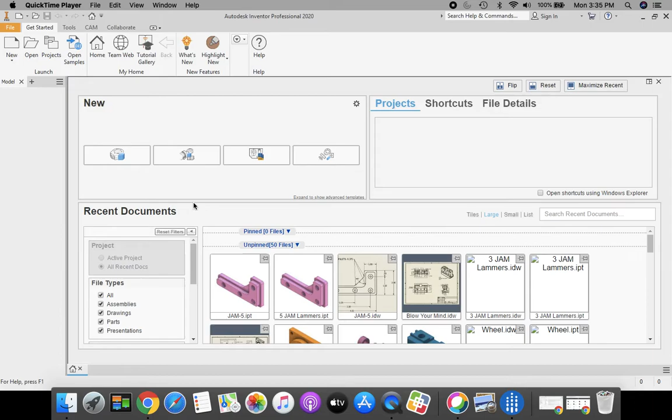Either you have your 5-jam part still open on your screen, or you need to go up to the ribbon and go to open. And then we're going to select our H drive from the pull down menu. Remember, that's that gray box with the green line underneath of it. Scroll down, find your 5-jam part, and click open.

Okay, so once I have my part open on the screen, what I need to do first is above the ribbon bar, change from the 3D model tab and go across to your CAM tab. Once you're in your CAM tab, the first thing that we need to do is set up our part. So click on Setup, the Setup folder right here, and that should initialize a new tab in our model browser that's over here on the left hand side.

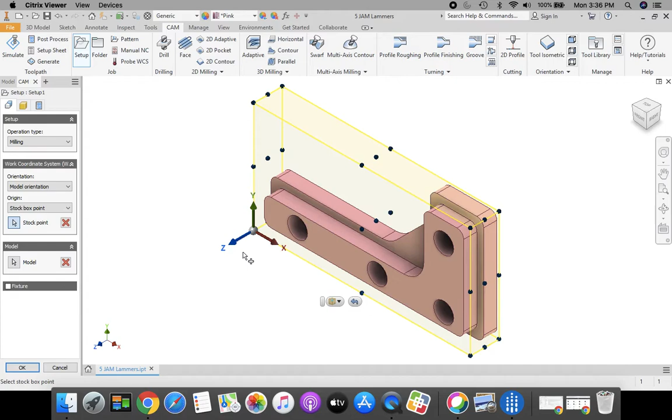Okay, the first thing we're going to do is choose where it says origin. We want to have it say stock box point. You can see that our origin is sitting in the middle of our part. We need to choose the lower left hand corner of our part for our origin, because that's where our mill starts.

Next, let's move across to our stock tab. This is something new for us. Usually we've been changing this to no additional stock. We're going to leave it at add stock to sides. We're going to change the side offset here to 0.25. Everything else we're going to change to 0.

Okay, so here, add stock to sides. We want 0.25 for the side offset, and top, bottom, and round to the nearest we're leaving at 0. It increases the size of our part, but it leaves us enough that we could run our tool along the outside of this and still leave those tabs and have it clamped into the mill. So let's look at how to cut this.

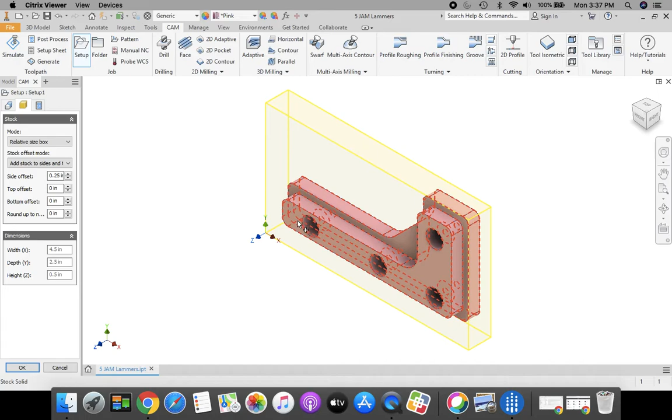The first thing that we're going to do is pocket these areas in here where we had that weight reduction and for our counter bores. We're going to do that on a 2D pocket, and then we're going to come back, drill our holes, and then contour cut going around the outside of our part.

Let's finish up with our last tab. The program name and number, I'm going to highlight that 1001, and I'm going to put in 5-jam, name of the part, plus your last name, and then click OK.

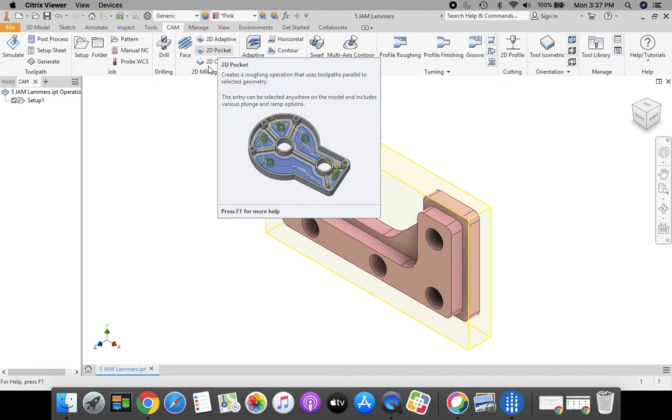Alright, let's take a look at how to cut this part. The first thing we're going to do is choose our 2D pocket from our 2D milling area. Once again, we need to choose that tool, and either we're taking it out of sample libraries and end mills, tool number 2, or you scroll all the way down to the bottom, Butler MS tool library, 1/4 inch flat tool number 2 is what we're starting with, and click select. It shows us what our tool looks like. Let's move on to our next tab.

We're going to select our pockets. Now first I'm going to rotate this around so that I can see the bottom of the counter bores. You can do that by using the rotate tool here. Then I'm going to select my geometry. So I want the bottom of each one of these counter bores. When I zoom in, I want to make sure I'm getting that bottom surface, not this outside edge. And I want to do that on all 4 of these counterbore surfaces.

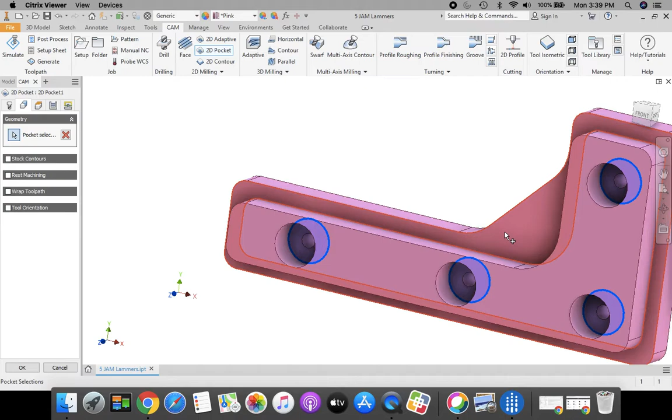And the last thing I want to do is click on this area for that weight reduction that we're cutting away. And go home. That looks pretty good. Next, let's go establish our heights. Same as we've always been doing, we're going to use model top and 0.2 for each one of these in the top 3, model top and 0.2.

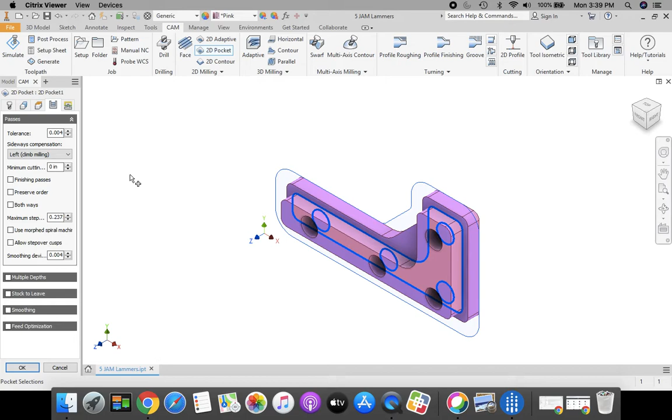Once you have that done, moving across to our next tab, we are going to uncheck where it says leave stock. We don't want any stock left over, we want it right up next to our geometry. Next tab over, we're going to uncheck lead in, uncheck lead out. And our ramp style, we're going to change to plunge. Okay, that looks great. Good job. Click OK in the model browser on the left-hand side.

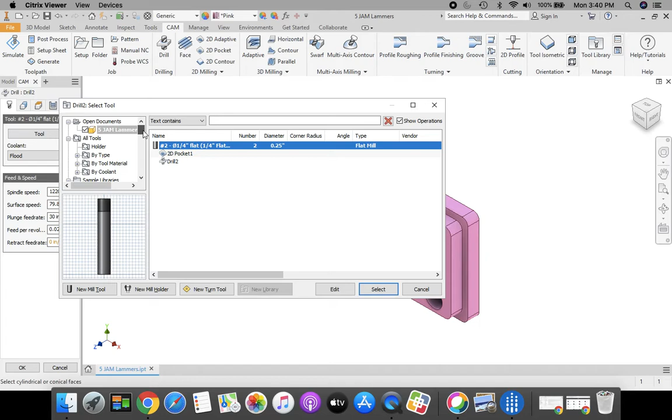Okay, next we're going to take a look at drilling those holes that are in here. So I'm going to go next to my drilling operation. Click drilling here. And what I want to do first is select which tool I want. That is in our sample tool libraries and end mills, we're going to choose tool number 1. Or you can scroll all the way down to the bottom, Butler MS tool library, choose tool number 1, 1/8 inch flat end mill. Click select.

Once again in my navigation bar on the right hand side, I can click rotate and rotate this up so I can see those holes. I'm going to change to my geometry tab and click each one of these 1/8 inch holes that we made with our hole feature. It doesn't matter what order you click them in, since we have optimized order turned on, so the computer will decide the order for us.

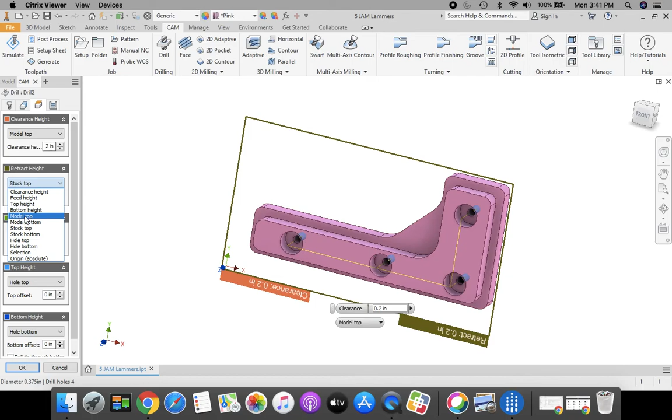Next, let's establish our heights again. As always, we're choosing model top and point 2 for top, retract, clearance, and feed height. That seems to work really well for us. Moving on to our final tab, it shows us that it's a drilling operation, and afterwards it will rapid retract out of that hole to move on to the next thing. Click OK at the bottom of the model browser when you're finished.

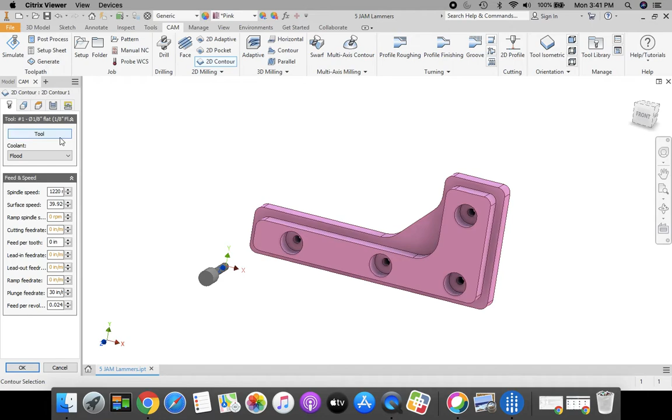Now we're going to go on to our contour. This is something new for us. We're going to come up to 2D milling and find 2D contour. I'll click home first. The first thing we want to do is choose our tool. We're going back to our 1/8 inch tool and changing it to 1/4 inch, so tool number 2, 1/4 inch flat, and click select. That gives us the right tool to go around the outside of this with.

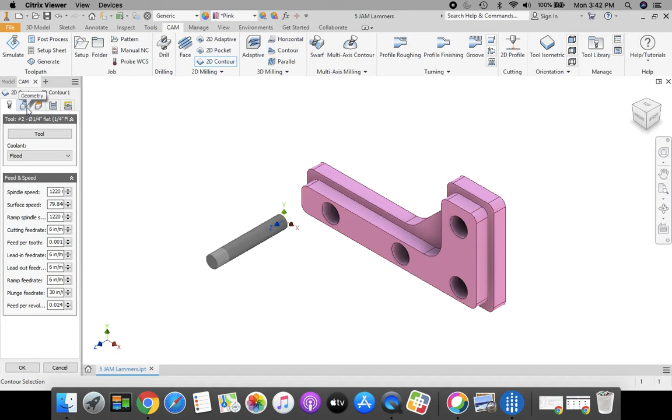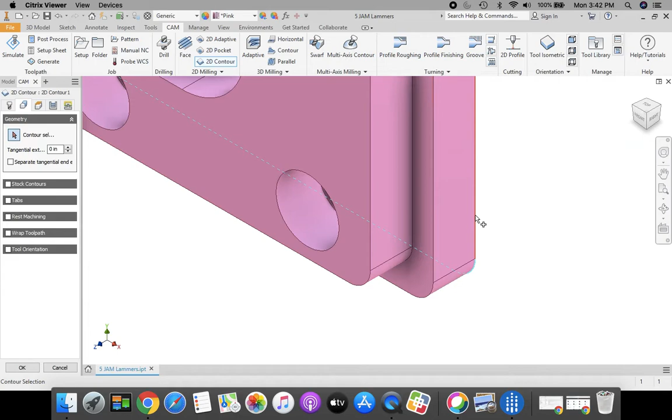Next, we're going to go to our geometry tab and select this bottom edge. Let me zoom in to show you - I want this bottom edge of my part. Make sure you're not selecting a surface or a top edge, we want the bottom edge, the back edge of our part. See how that back edge is all highlighted? That's what we want. Then in this same tab, we're going to turn on the tabs option.

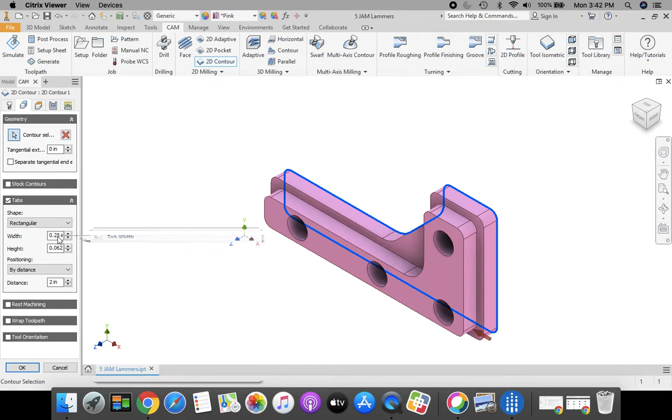In here, we'll be okay with rectangular. We can have a width of 0.25, height of 0.06, and the distance spaced 0.75 apart. You can see how it puts our tabs in here, so that when we're clamping our workpiece, these tabs will hold it, and it will be clamped in place still after we're done cutting. So that's something new for us, this tabs option.

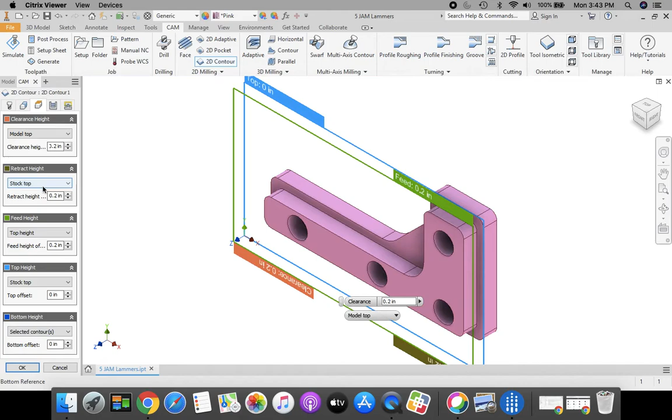Let's move on to establishing our heights now. Once again, model top and point 2 for each of these top 3. Next, for our passes, we're going to scroll down. Stock to leave is already unchecked, so we're good to go.

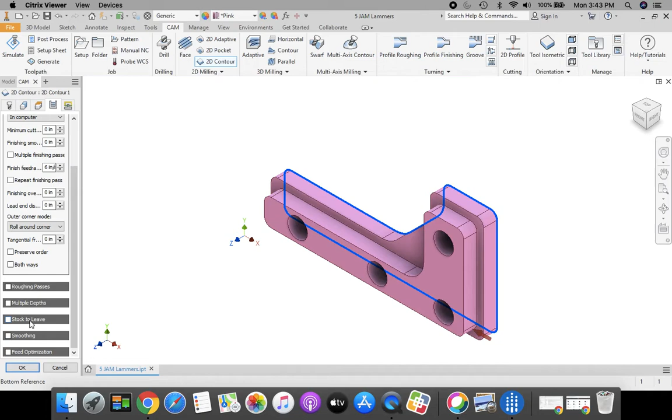Move on to our last tab, the linking tab. We want to uncheck lead in, uncheck lead out, and our ramp - nope, our ramp is fine, we're going to leave that the way it is. Okay, so we're looking good, that's our last tab. Click OK.

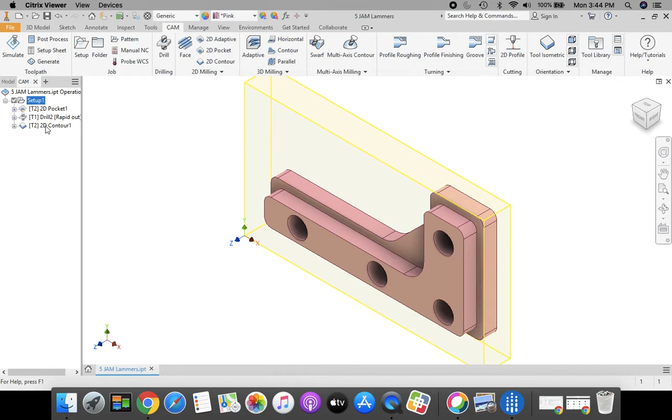So here we have our three tool paths that are created. Let's go up and click Setup 1. That's going to take care of all of our setups, and you can see from my front view how I have extra stock at the top and the sides. I'm going to turn my simulate on, select the stock option that shows us my full part, and click play.

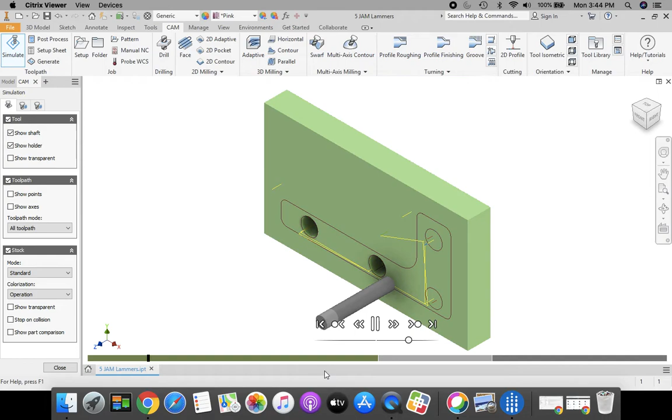It's going to cut those counter bores, then it's going to pocket out the area, drill our holes, and then it's going to contour cut around the outside of our part, leaving those tabs. That gives me a good representation of what that looks like.

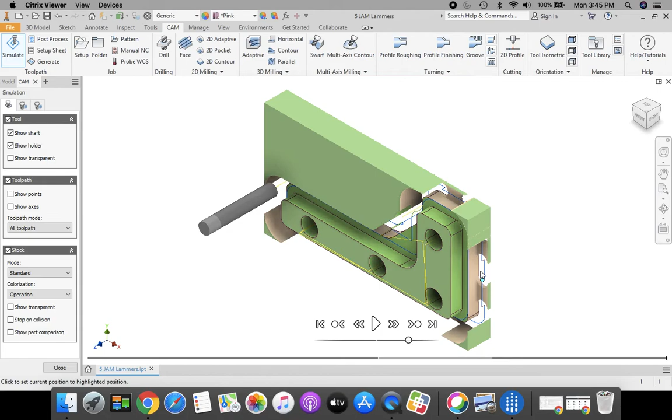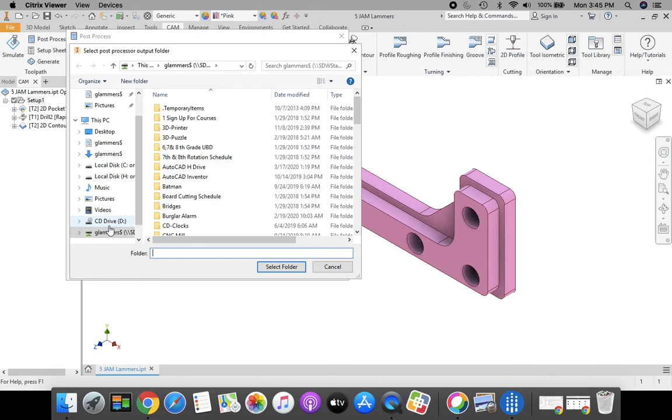Next, we're going to close out our Simulate tab, come up to the top, and select Post Process. We're going to select from our H drive - if this doesn't say H colon slash slash, click on this gray box and make sure your H drive is selected. Name it 5jam with my last name, which should be that part number, then click Post, and click Save. Great job, you're all done running the toolpaths for this part.